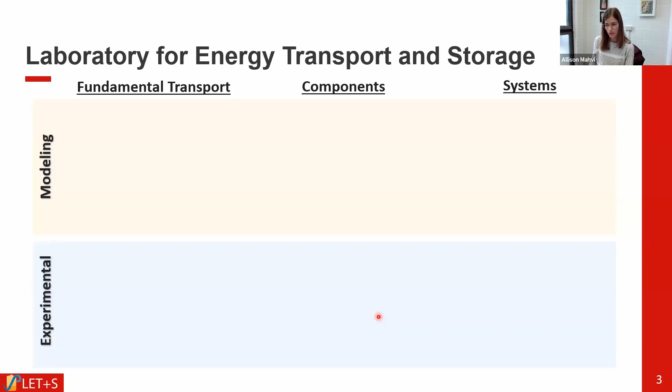In the fundamental transport space, we do a lot of coupling of modeling and experimental work, looking at things like annular two-phase flow, flow boiling, direct contact condensation, and other things like that.

This video on the bottom is an example of a direct contact condensation experiment we're looking at. We try to develop models that can predict things like acoustics, in this case of condensation, or dryout CHF, or heat transfer coefficients in the case of flow boiling, and use our experiments to validate models and try to understand the physics of the flow better.

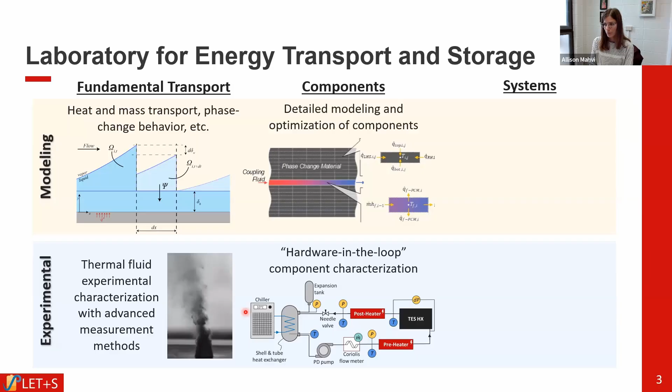We translate that work into developing components for different energy systems. This is an example of a thermal energy storage heat exchanger, a little different from the modeling and two-phase flow work shown on the left. Here, we're looking at how you design a thermal energy storage heat exchanger using different types of modeling approaches.

And then we test those components in a hardware-in-the-loop setup. We have a couple of these in our lab to make sure that the models we're generating predict the flow well.

And then we generally translate these components into systems. We've done some system demonstration type projects, some analysis around trying to understand if you optimize energy systems, you can quantify things like the operational costs, how do you optimize how you control the system, things like that. So generally, we try to get all of these different pieces to feed into each other and get a much better physical understanding of how two-phase flow and energy storage works inside of larger HVAC and power generation systems.

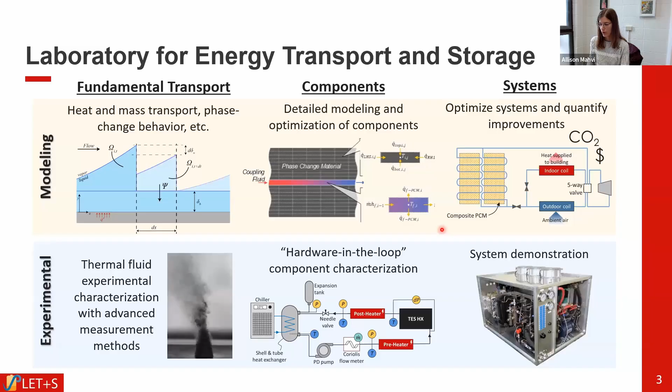So today I'm going to talk mostly about fundamental heat transfer, looking at flow boiling. Before I get started, I want to define critical heat flux. I think a lot of people work in this space, but just to get everybody on the same footing, critical heat flux, or CHF, is when a heated wall is exposed to a vapor.

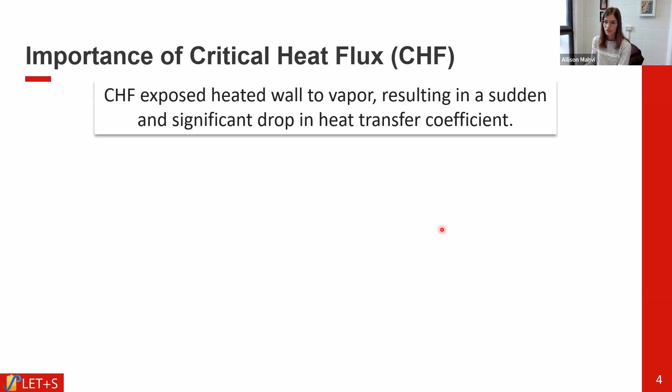Vapors are generally poor heat transfer fluids, and so you get a sudden and significant drop in the heat transfer coefficient. This can have different results depending on what type of system you have.

So if you have a heat flux boundary condition, that's something like a nuclear reactor, cooling of chips, where you just have a heat flux that is going to keep, or some object that's going to keep generating heat, if you drop the heat transfer coefficient, you need a larger driving temperature difference to dissipate that heat. And so the heated surface tends to become very hot.

In different scenarios, it can damage or destroy the equipment. Generally, boiling has a very high heat transfer coefficient, but it's usually used conservatively in cases with a constant heat flux boundary condition because you don't want to destroy your equipment.

You need a really strong understanding of when critical heat flux will occur so you can operate far away from that case. In temperature limited cases, this is an example of a vapor compression system.

The outdoor coil in this case is an evaporator, so it does have flow boiling inside of it. Industrial heat exchangers, and lots of other power generation systems, have heat exchangers with two-phase flow.

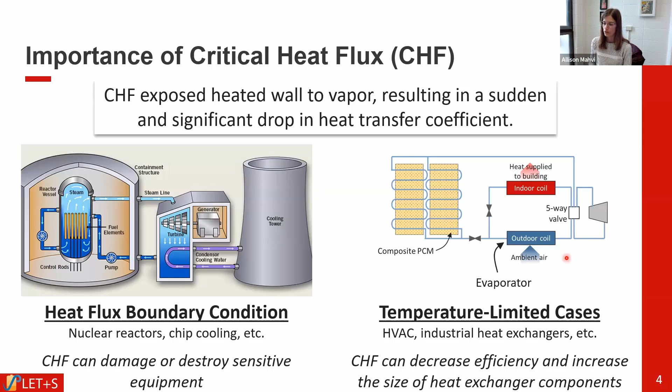If you have critical heat flux inside of these components, generally you're just decreasing efficiency. You have to increase the size of the heat exchanger components. There's a lot of disadvantages to going to critical heat flux, but you're generally not going to destroy the equipment. So it's just kind of different scenarios of what can happen when you reach a critical heat flux case.

There's two different types of critical heat flux that I'm going to talk about. We're going to focus on dryout critical heat flux, which is when you have an annular flow.

On the left, you have a boiling case where the fluid's coming in subcooled. It's boiling through this channel. You get a film that forms on the surface and eventually dries out. Generally, it starts by this thin liquid film breaking up because it becomes too thin. It's not stable anymore. You start getting this transient dryout where you get these little dry patches that form between disturbance waves, and then eventually the whole surface dries out. And you get this drop in heat transfer coefficient that's associated with that.

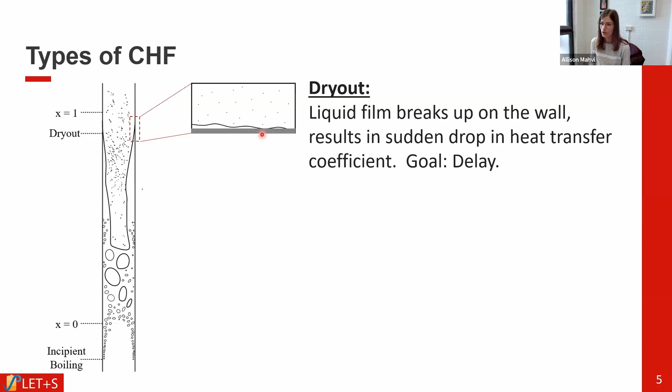Generally, the goal of dryout CHF is—in some cases, you don't need to fully evaporate the flow, so you just want to stay away from that. You want to stay at lower qualities and avoid it. But in a lot of cases, you want to delay CHF, so you want to delay it to as high a quality as possible so that you can shrink down the size of your heat exchanger. You don't have this region with a low heat transfer coefficient.

The other case of critical heat flux, where you get a vapor that's in contact with the wall, is called departure from nucleate boiling, or DNB. This is where you get lots of these vapor bubbles. They crowd the surface, they start conglomerating on the surface, and you get a vapor blanket that causes film boiling. So all of the heat then needs to transfer through the vapor before it can start evaporating the liquid.

You just generally want to avoid this at all costs. There's been a lot of research around departure from nucleate boiling, a lot of it focused on the nuclear industry, and there's been work trying to increase the heat flux that DNB occurs at. But generally we want to know it with very high certainty—where is this limit? When are we going to get to DNB?

I'm specifically going to talk about dryout CHF. There's been less work around that, and we have been doing some interesting modeling in that space to try to understand when it will occur, with the goal in the future of looking at how we can change the surface, or what we can add to the surface, that will impact dryout CHF.

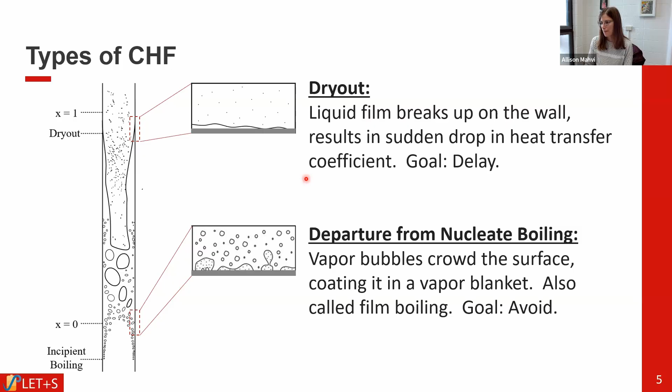So if you look at CHF modeling approaches, there's a range of complexity. On the simplest side, there are a lot of empirical curve fits or lookup tables that take a lot of experimental data—some database with many different boundary conditions, ideally lots of different types of fluids. Some are around a single fluid, some have lots of different fluids in them. And usually you try to non-dimensionalize different parameters that are important, then fit the data so that you can predict things like CHF or heat transfer coefficient.

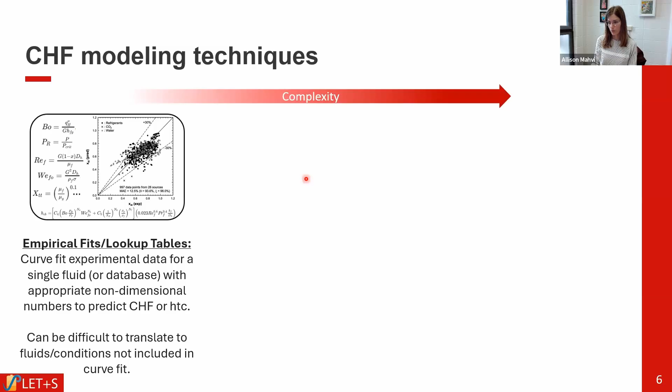There's a lot of advantages of these types of correlations or lookup tables, and they're commonly used, mainly because they're really easy to implement. You can write an equation—it's one line of code, something like that. The challenge is that it's not very easy to transfer. So if you want to translate to some other fluid or some other flow condition that's not in your database, you don't have very high confidence that you're going to get the right CHF or heat transfer coefficient value.

In a sort of intermediate complexity, there's mechanistic models. These usually try to discretize the flow in the flow direction and get an idea of how the different main properties of the flow interact with each other.

This is showing an annular flow case that's looking at the liquid film and a vapor core. There are other versions of this type of thing. The advantage is that it reduces computational time a lot from more complex models. You could theoretically translate to other fluids because you're doing a better job at trying to identify the physics that's happening. But the problem is they usually rely on closure relations, which we'll talk about, and you need pretty good closure relations in order to be able to translate between fluids.

And then on the most complex side is computational fluid dynamics models. These are where you discretize the conservation equations in 2 or 3D. They can be very computationally expensive, which is why they are not used generally for very large time-dependent data sets, but they can be very useful at translating to different fluids or different scenarios that are not a standard constant heat flux or something like that.

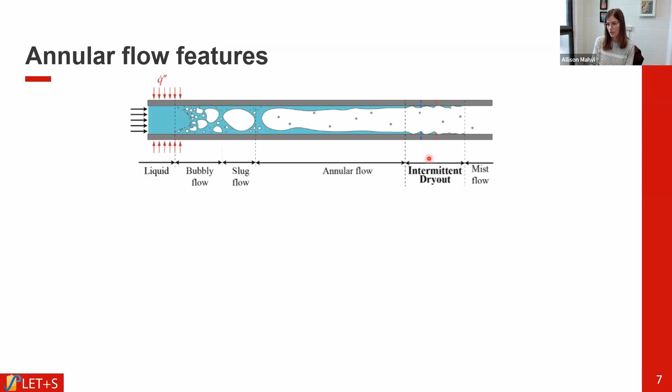So I'm going to show a video. There's fluid that's flowing from the bottom of the video to the top. There's this annular film on the surface of a glass channel, and then there's a vapor core going through the middle of it. So there's a couple main features that I want to point out.

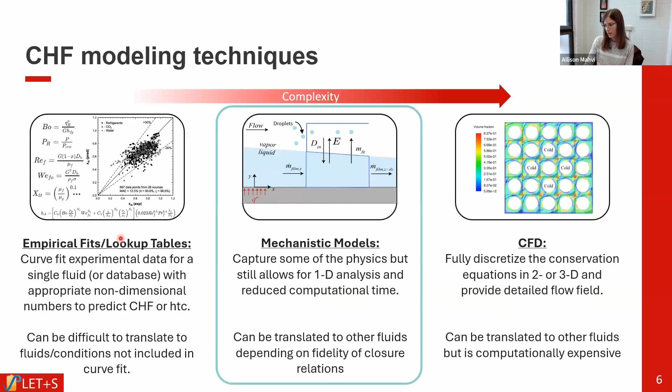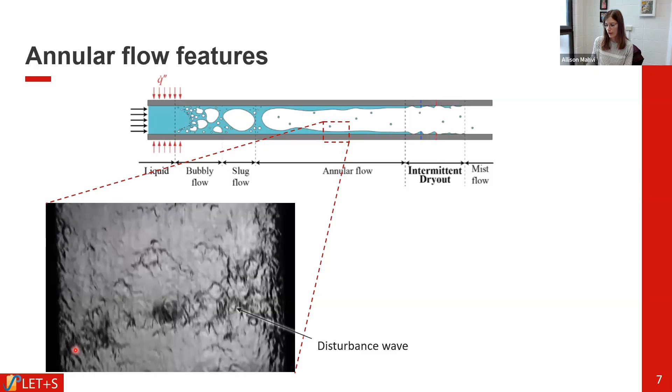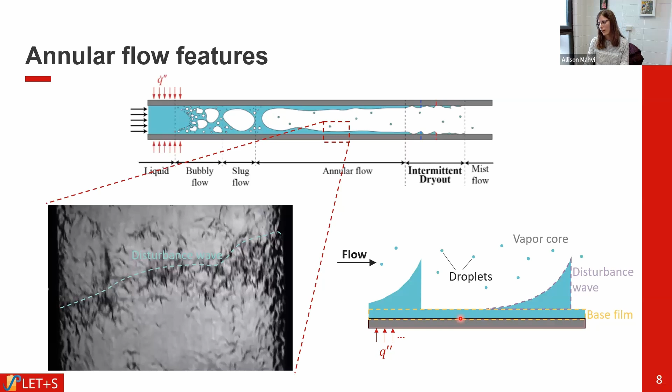So this is just a schematic of the same thing. Here's this disturbance wave. You have these disturbance waves on top of a base film. The base film tends to have these very small waves in it that don't have a huge impact on the total heat transfer coefficient or CHF. And then there's these droplets in the flow. They tend to be moving with the vapor core, moving pretty quickly, and they come from these disturbance waves. They get ripped off of these waves and stay in the vapor core. They tend to be hard to evaporate because they're not very close to the heated channel. So these are the main features: droplets, vapor core, a disturbance wave, and a base film.

The disturbance waves are pretty important. They carry a lot of the liquid mass. They're pretty thick, they're turbulent, carrying a lot of mass in the flow. When the flow is intermittently drying out, you get these dry patches that form, you can see it in this video, and then these thick waves come and re-wet that surface. Right as you're starting to dry out, the waves are what's keeping the surface cool. And then when they can no longer do that, maybe they're spaced too far apart, or they're not carrying quite enough mass to fully re-wet the flow, then you get to this more severe dry out case where the whole surface dries out.

Dry out has the disadvantage of dropping the heat transfer coefficient, but in some cases, if you have impurities in the flow, for example, they tend to deposit on the heated surface in this region that's drying out. And so that can be another issue in your flow. You need to deal with corrosion and deposition of different impurities in this region.

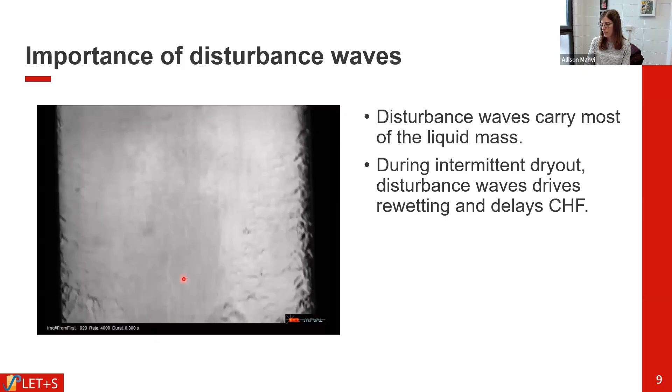People use mixture models a lot to understand what's happening with liquid films. In the 70s, a couple different research groups looked at adding more features of annular flow to it, so instead of just a liquid film and vapor core, it also measured droplets, looking at entrainment of droplets and deposition of droplets onto the liquid film, trying to get closer to reality and get a better prediction of heat transfer coefficient and CHF.

Then in 2022, one of our collaborators, Jean-Marie Le Corre, developed a 4-field modeling framework that looks at the base film and the waves separately to try to get more at intermittent dry out and predict dry out a bit better.

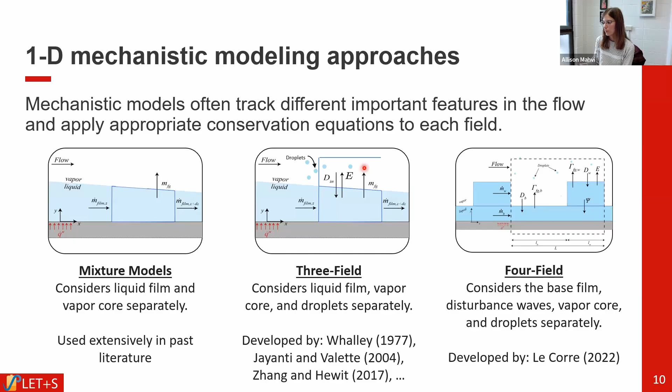Some of the motivation for this was also looking at impurity deposition, when that might occur when you get really thin base films. So we've been developing that code with him, trying to come up with a model and supplying experimental data to improve the fidelity of it.

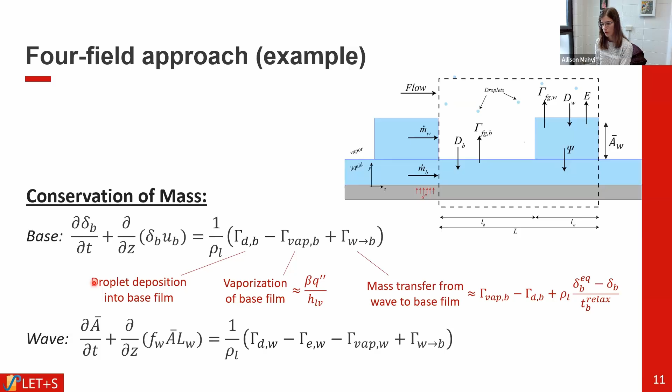To get at some of these properties, we need to know things like the wave shape and surface area, the equilibrium base film thickness, the time scale to return to equilibrium state inside annular flow, and wave frequency and wave dynamics. There's a lot of this information that we need, and it's generally hard to measure, so we wanted to get a better idea of how those pieces worked.

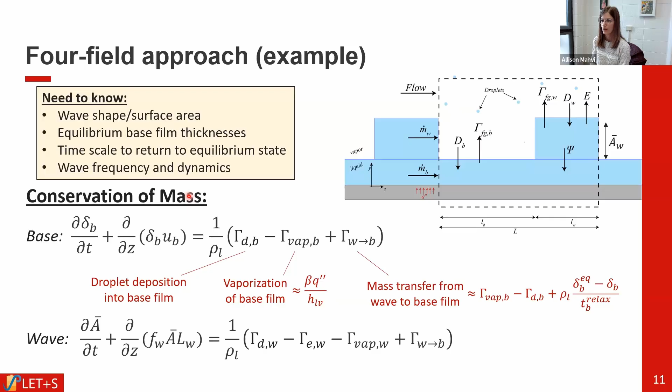Jean-Marie Le Corre, who originally developed this model, did a validation study this year at NURETH looking at prior work, first from Würtz, who studied adiabatic annular flow of water at 7 megapascals. Jean-Marie compared his experimental data to the 4-field model he developed, and found it compared well for things like base film thickness, wave velocities, and wave number density—good agreement between the adiabatic data and this modeling approach.

He also looked at the non-equilibrium, how it returns to equilibrium. This is a data set where the left side of the x-axis is a heated section, and the positive side to the right of the dashed line is adiabatic. We're trying to come up with how the film reacts to this change in boundary conditions.

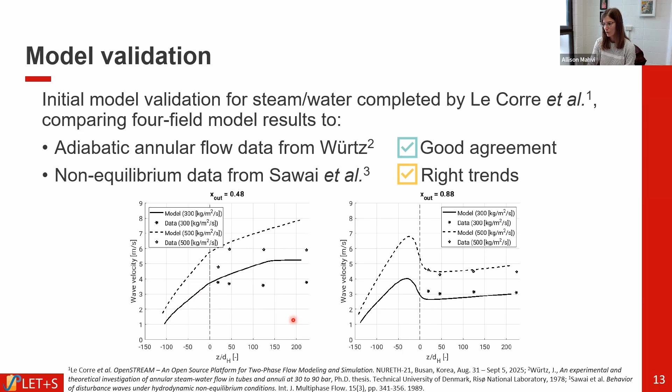The model is shown as lines and the experiments as points. We found generally the right trend in the data, although this needs more work in understanding how this non-equilibrium transition happens, getting more data for more cases, and diving into it in a bit more detail. But we did generally have the right trends.

With one of my collaborators, Juliana Duarte at University of Wisconsin in the nuclear engineering space, and her student Cole Dunbar, we're trying to take this model we developed and move it into a more complex system. The experimental data from the last slide was a single channel flow with a relatively simple boundary condition.

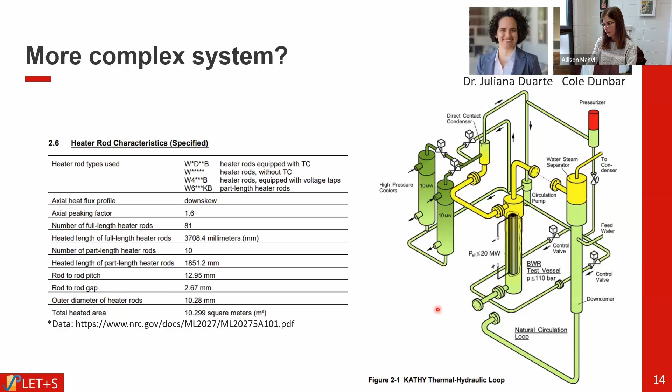We took the same modeling approach and tried to apply it to a boiling water reactor, specifically looking at the KATHY thermal hydraulic experiments, where they tested a fuel or rod bundle of a boiling water reactor at prototypical conditions.

So we're working on the second portion of this, but the first portion was looking at a 3-field model. We want to understand when we'll get to the critical bundle power for this rod bundle. We used the code we developed and looked at steady state data with an axial power profile, like some cosine profile for heat flux along the length of the channel. On the y-axis is the model predictions, and the x-axis is the experimental critical bundle power. We generally found great agreement at steady state. The model did really well. This is encouraging. It did a little better than we were expecting, actually.

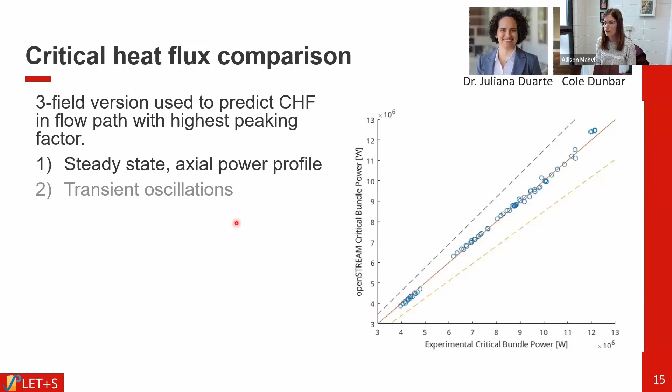And then we're still looking at this transient data. One of the things that makes some of these mechanistic models shine more is when you have really complex boundary conditions. Maybe you have something causing oscillations in your flow, some instability, and you want to understand how the surface temperature is going to oscillate. It's hard to find something like that in a lookup table. So you can use these mechanistic models to get there.

Just a note, this is a very different case. It's not a single channel, so we did have to change our code slightly to deal with all of these spacer grids. Boiling water reactors tend to have spacer grids as you move up the channel, and those distribute the droplets. The droplets in the vapor core get redirected at the surface and can re-wet it. We made some assumptions about how that happens inside the model, which helped with the fit here.

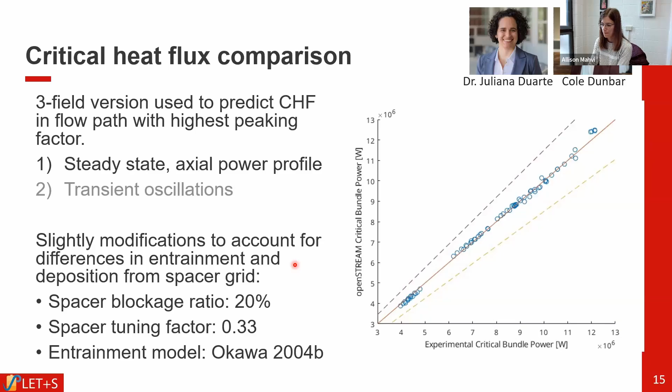Okay, so what I've talked about so far has only been water. The vast majority of past work in critical heat flux has been for high pressure water systems, a lot of it motivated by the nuclear industry. But it's not clear how we take models developed for water and translate them. Specifically for this 3- and 4-field approach, there's a bunch of closure relations, like droplet entrainment, baked into the model. We wanted to understand how important those models are, how well they capture other fluids, and whether it's transferable. If we look at a totally different situation with a different fluid, a different system, will we be able to do that?

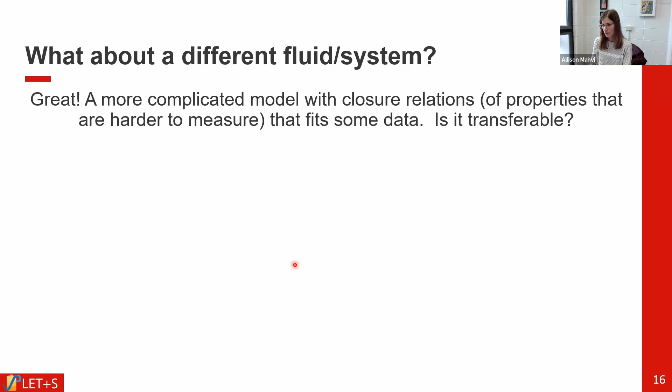So typically what you do is run a new set of experiments, make sure your existing models work, or try to tweak your existing models for this new refrigerant. We're trying to skip over that step and just use some sort of mechanistic model, hopefully one that captures the physics well, to get to the critical heat flux.

If you look at our current model, we've been looking at boiling water reactors, and the properties are just very different than a refrigerant. The enthalpy of vaporization is much, much higher. Density ratios tend to be a little bit lower. And the Weber number is much different than a refrigerant. So it's not clear that it's transferable.

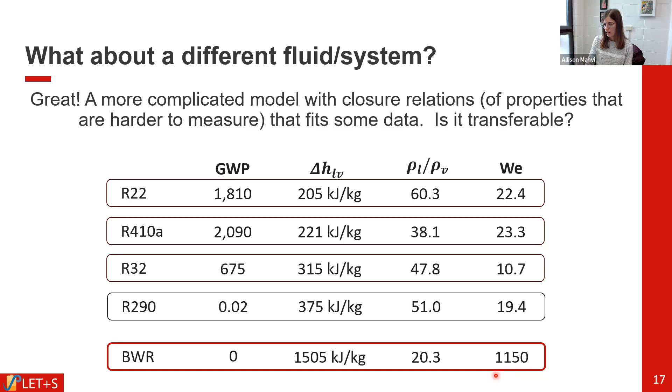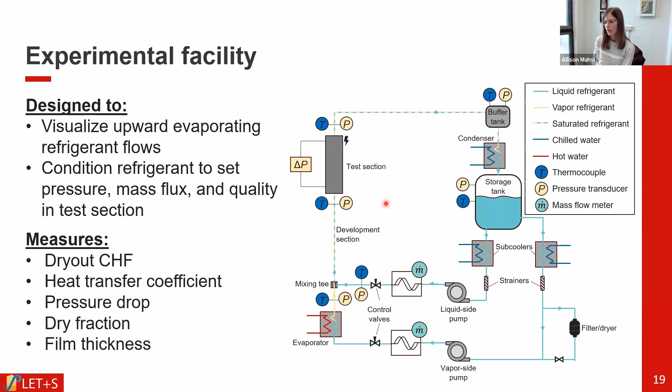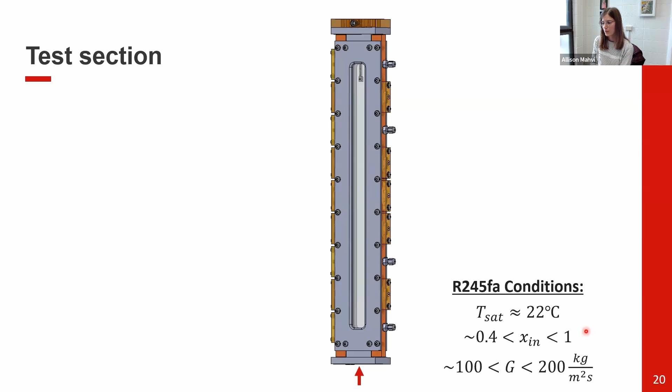So this is a picture of our test section. We send refrigerant in through the bottom at some pressure. Most of our experiments are run right around ambient temperature, which makes it really easy to change the conditions and pretty fast to get up and running. Quality is between about 0.4 and 1, and mass flux is between about 100 and 200.

If you look at a cross-section of the channel looking up, you can see that our channel is rectangular, 36 millimeters by 12 millimeters. This is all annular flow experiments, so there's a liquid film along the surface of the channel, and then a vapor core through the middle.

There's a glass pane on 2 of the sides, along the 2 long sides of this rectangular channel. It's coated in an FTO coating, and we pass a current through it and Joule heat it. In some cases we have a little obstruction on the surface, and in some cases we don't. The point of the obstruction is just to understand how liquid films respond around solid surfaces.

The optical window is really nice, having this transparent window that we can heat but still see through. So we can do flow visualization using a high-speed camera, and we can do a lot of optical measurements.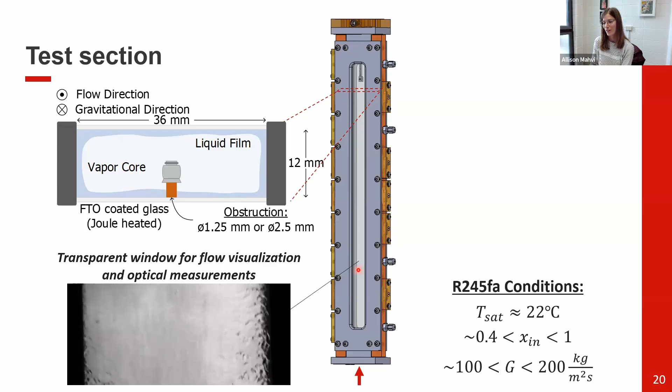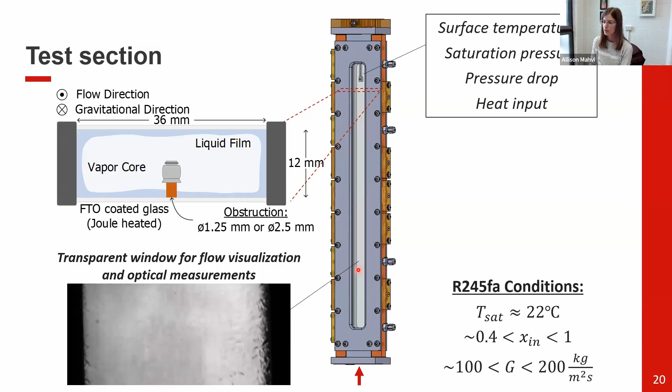These liquid films tend to be very thin. If you start putting sensors inside of the liquid film, it can be a problem for measuring what you want to measure. So we really try to use optical techniques and try not to put anything inside of the flow channel. Beyond these optical measurements, we also measure things like surface temperature, saturation pressure, pressure drop, and heat input, which gives us things like the heat transfer coefficient, a helpful property for us.

I want to talk through some of these optical measurements. We specifically try to use optical measurements that aren't super complicated and are pretty easy to implement on the side of our test section, so that we can get a lot of data from these pretty quickly. We can change things very fast, and it's not very sensitive.

The first thing that we measure is dry fraction, the amount of time the surface is vapor versus the amount of time the surface is liquid. We do that by using a laser directed at the test section at a specified angle, and we measure the amount of light that gets reflected into a photodiode.

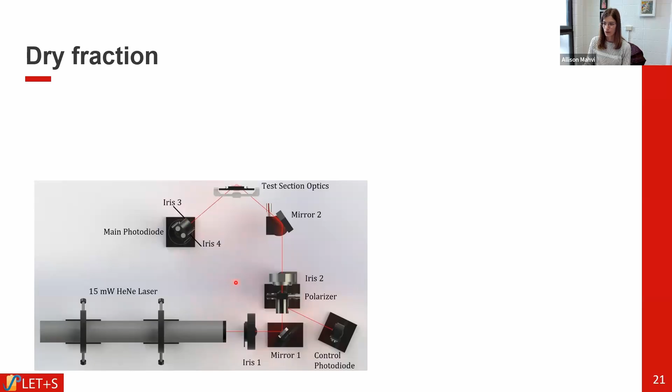This light passes through the glass of our test section, this heated glass. If there's gas on one side, there's a big index of refraction change between the glass and the refrigerant vapor, so more light gets reflected back at the photodiode. Whereas if it's liquid, there's a smaller difference in index of refraction, so you get less light reflected back.

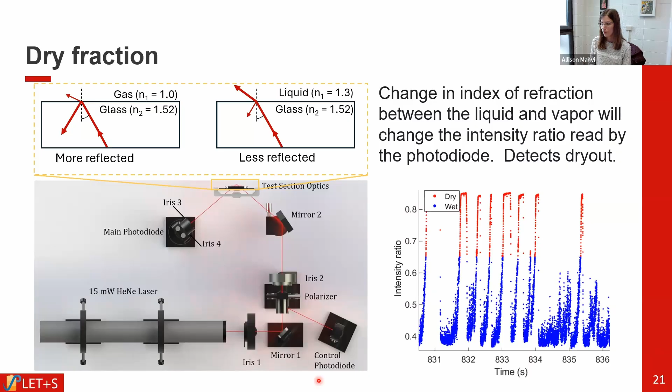So we really look at the intensity ratio of the light incident on the test section versus the amount coming back. This is an example of the data we get: intensity ratio on the y-axis and time on the x-axis. When the intensity ratio is small, the surface is coated with liquid, and when you get a spike in intensity ratio, you have vapor on the surface. We're really looking at the time comparison between these two things. It can tell us the frequency of waves, and other things, and can help us predict heat transfer coefficient. You can collect a lot of data because you're just measuring a single point with a photodiode, at a really high frequency, which is helpful.

This is an example of what we use that data for.

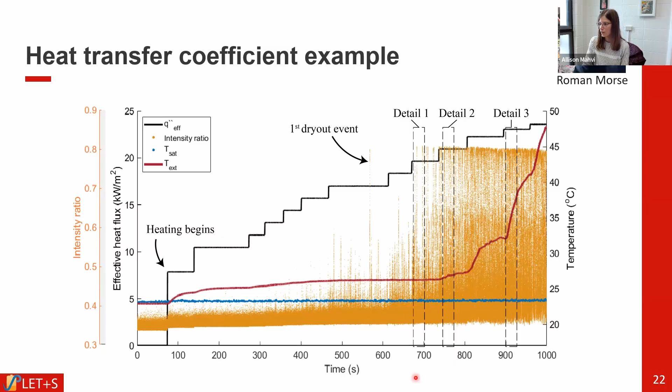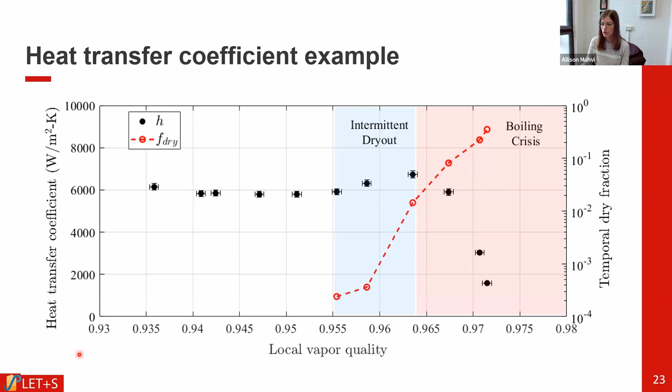This dashed line is the temporal dry fraction, how much of the time the channel is dry versus wet. You need to get past a certain threshold - if the channel just has a little blip every once in a while becoming dry, it doesn't really impact your heat transfer coefficient much. Whereas if the channel is dry for a large period of time throughout the test, you get this really sudden drop in the heat transfer coefficient at some quality.

So that's dry fraction, one thing that we're measuring. The other thing that we're measuring is trying to understand the disturbance waves. We really want to get at how the disturbance waves are dynamically changing, how they are impacted by boundary condition and operating condition. The way we do that is by measuring the liquid film thickness.

Again, there's lots of different ways to measure the liquid film thickness. We wanted something optical and something that was pretty easy to implement. So this setup uses a laser. You direct the laser at the glass channel, and we have a little thin piece of tape on the surface of the channel that diffuses the light.

When the light diffuses, if it hits this liquid vapor interface where there's a large change in index of refraction at a relatively shallow angle, it'll just continue going through the test section, keep going to the other side. But for some of this diffuse light, if it hits this liquid vapor interface at a large enough angle, something beyond the critical angle, it will totally internally reflect and get reflected back towards the laser.

We then have a high-speed camera to pick it up that can operate at pretty high frame rates, and we can get an understanding of how the liquid film is changing inside of the flow.

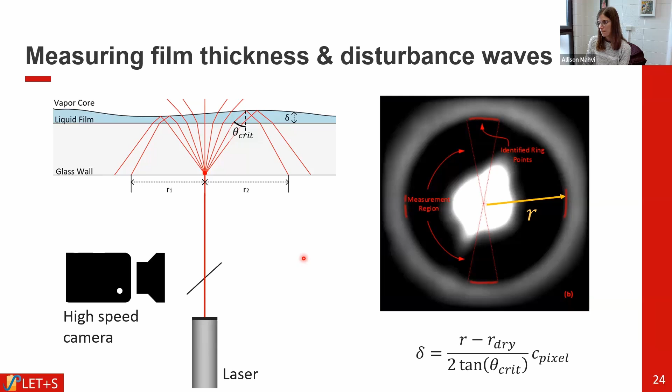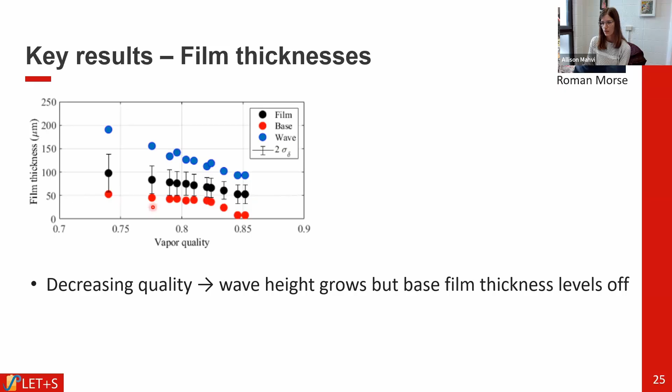As you decrease the quality, we found that the wave height grows, which makes sense, but the base film thickness levels off. We found that generally it levels off around the thickness of the viscous sublayer if you put it in wall units, which is an interesting finding in this particular experiment. We're currently evaluating different closure relations to try to understand how the base film thickness changes with fluid properties, looking at some of this water data as well as our refrigerant data.

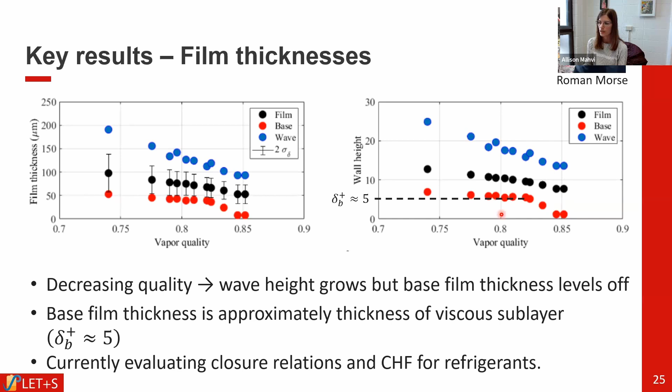All right, so that gets a little bit at the refrigerant case. It's still a work in progress. We're trying to understand how four-field models can predict refrigerant CHF. We're also extending this in a couple different ways. I'll talk about one of them today.

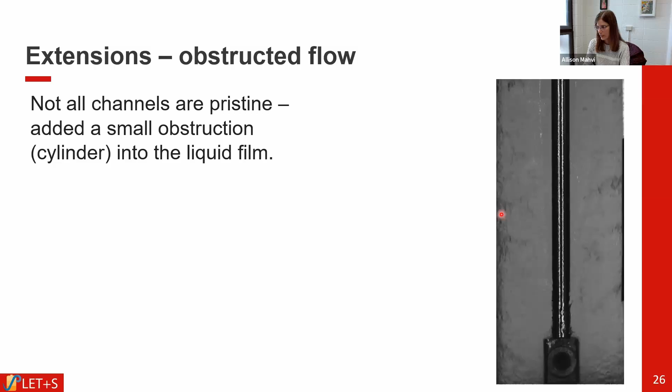We are looking at flow around an obstruction. This is just a small cylinder in the flow, some imperfection, maybe a fuel pin or something else, or something purposely put in the flow, and trying to understand how the liquid film goes around it.

So there's a couple different regions that you can see. We have this obstruction at the bottom. Before the obstruction, the flow is undisturbed, so it looks exactly like it would if there was no obstruction. This is the upstream region.

Once it hits the obstruction itself, it forms a wake. And in that wake region, immediately after the obstruction, you get a recirculation zone. You can see these vortexes forming inside of this zone. It's pretty chaotic.

And once you get past that general region, you get a very thin liquid film. It's very calm. Generally, as the liquid film gets thinner, the disturbance waves go away. So you get this calm, slow-moving liquid film that eventually dries out inside of this wake region. So you get this small region of dry out downstream of the obstruction.

And then on the periphery of the channel, you get this exterior free stream flow that has a lot of these disturbance waves still in it. The film is pretty thick out there. And so when you do have obstructed flow, you tend to get premature dry out, but only in a small region. It's only in this wake region. And so it doesn't necessarily have a huge impact on what's happening at the periphery.

In addition to some of these kind of videos, we put in a bunch of thermocouples downstream to try to get an idea of how the heat transfer coefficient varies as you move downstream of the obstruction and what's happening with the fluid itself.

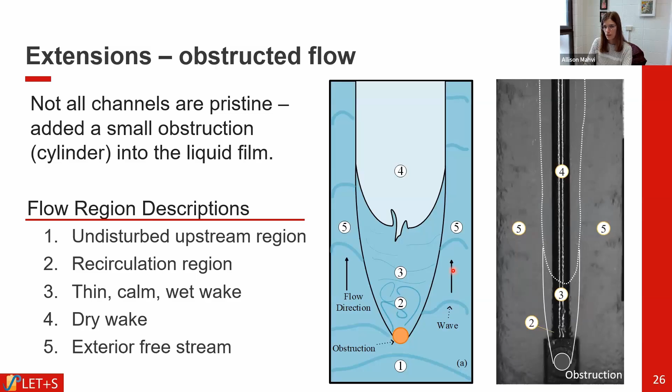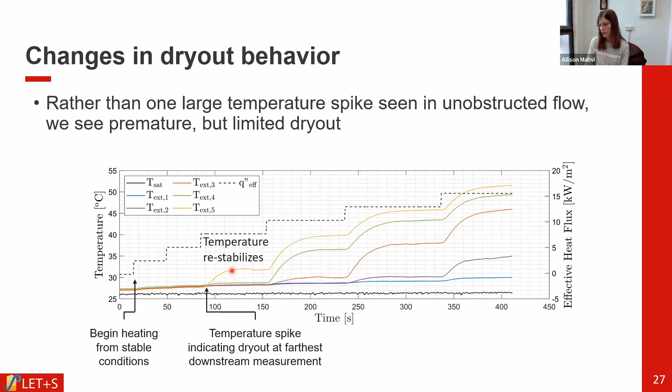So eventually, at certain locations, you get the flow drying out in this wake region. It starts pretty far downstream from the obstruction. And then as you increase the heat flux, you get this dry region extending farther and farther upstream to these closer thermocouples. And every time you do that, you get this increase in the temperature and usually it restabilizes.

It starts getting pretty hot, but it's not running away in the same way that it ran away in the cases without an obstruction. And just to note, the heat fluxes are lower here, so it tends to dry out sooner. Maybe this has problems around like corrosion and deposition, but you don't get this really dramatic runaway effect. You get kind of a steady increase or a steady decrease in the effective heat transfer coefficient, and it's proportional to the wake size.

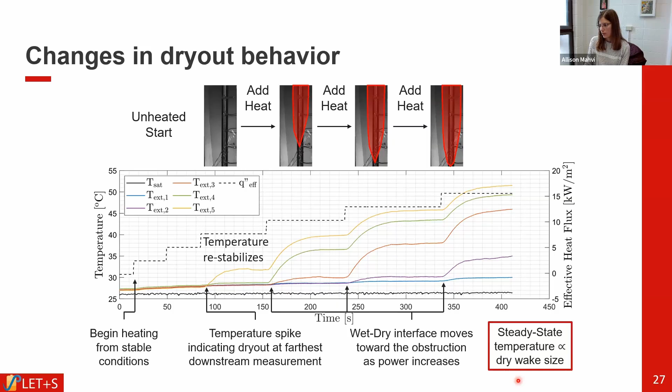So generally, we found that the film thickness ratio between this wake region and upstream is not very impacted by the inlet quality. It's not impacted very much by the heat flux. There is an impact on the mass flux coming into this obstruction and the size of the obstruction itself.

So if you have a large obstruction and relatively slow moving fluid, the wake region can have 20% or so of the film thickness of upstream. So there's a really dramatic change in the amount of mass going in the wake region versus the periphery. Whereas the smaller the obstruction, the higher the mass flux, that wake region becomes less important and you don't see dry out as much.

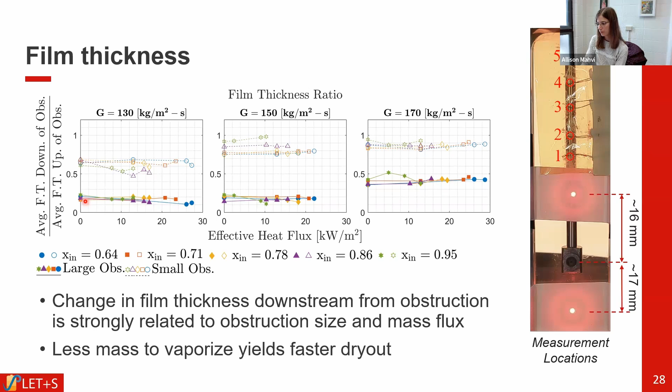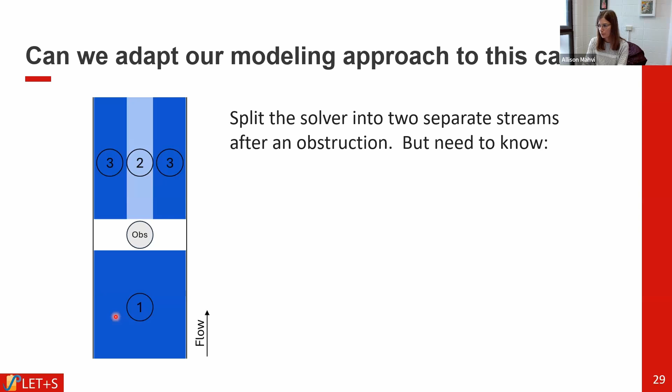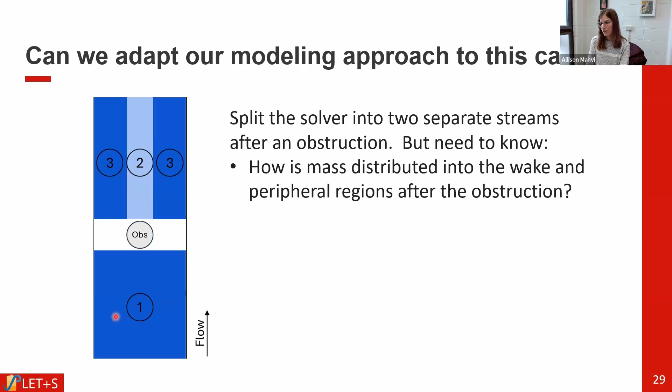But to be able to do this sort of thing, we need to answer some questions. We need to know how the mass is going to distribute around an obstruction. We need to know how the waves are impacted by it. We see generally that the waves split around an obstruction and don't reform in the wake region. They mainly stay out in region 3.

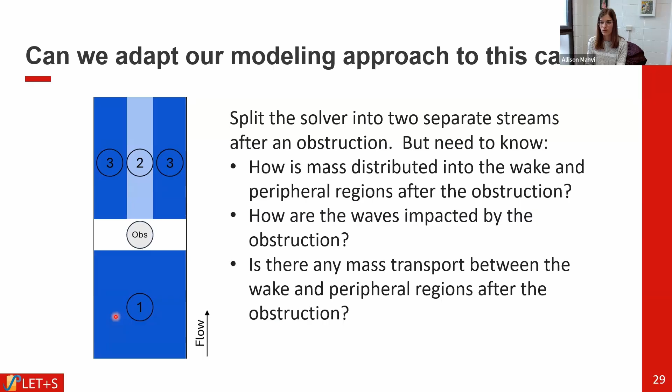We also need to understand mass and momentum transport between region 2 and region 3. Do you get this wake region where they don't interact with each other too much, or do they continue to interact as they move downstream? So those are some questions we're trying to answer now with these obstructions.

This is actually a falling film setup, but we took a long exposure video to try to understand how the film is going around some obstruction in a thin liquid film. So what we did is we seeded the fluid with a bunch of particles, and then used particle tracking velocimetry to get a velocity profile around it.

Here, we didn't use this particular image for it. We tried to track particles, but this shows you these streaks in the flow. You can see the fluid going towards the center, a very slow moving fluid in the immediate wake. This case is not very typical, but shows you a more dramatic velocity gradient around an obstruction.

And then we looked at film thickness mapping. We wanted to understand, if you take a slice of this thing, what is the film thickness across it, so that we can get a better idea of mass flow. Right now, we just had the film thickness - we don't actually know what the mass flow rate is through these different tracks, and so it's hard to actually model it in our four-field approach.

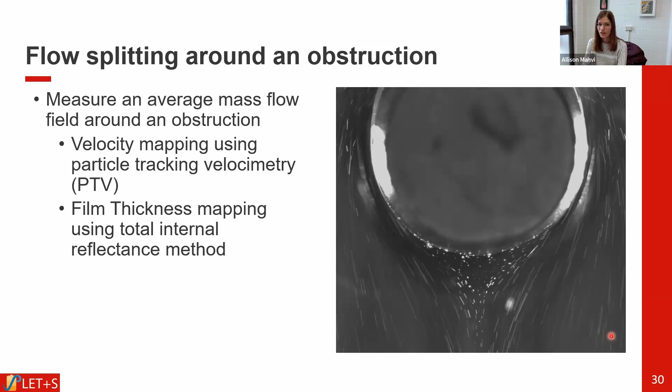So this is the type of data that we're getting out of these experiments. There's a lot of information here. On the top, you have some obstruction. We're imaging the flow downstream from it. Again, this is a little bit of a weird case - if anybody wants to talk about it, we can. But if you look at different distances downstream from the obstruction and different X positions, we measure the film thickness.

So this is this red dashed line in kind of a slice across the flow. And then we also measure the mean velocity gradients across this window to try to get an idea of where is most of the mass. Is it - there's these regions that are both relatively thin. This red line is thin, and the velocity is slow, which makes sense together. And we can get an idea of what is the mass flow distribution downstream from the obstruction.

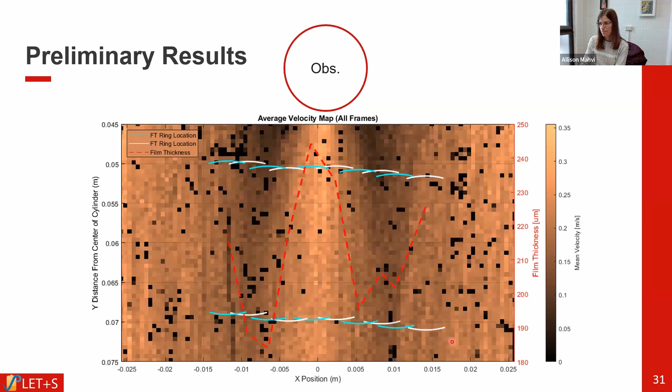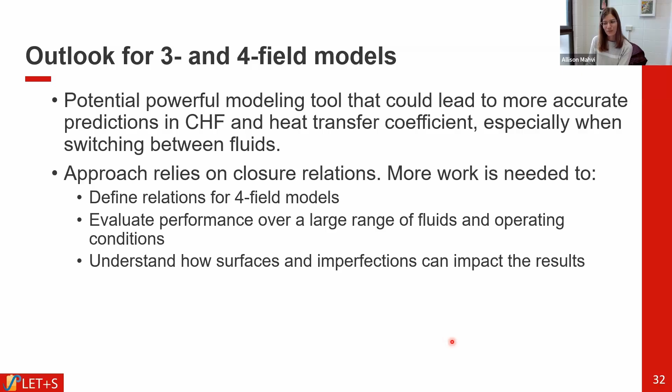All right, so just a little bit of an outlook for what to do with these types of models. They're potentially powerful - they can help predict CHF, heat transfer coefficients. You can switch between fluids, potentially, if you have good closure relations. But we really need more work on the closure relations portion of it.

So for the four-field models, there's not a lot of work around how the disturbance waves interact with different fields of an annular flow. And we need to evaluate performance over a much larger range of fluids and operating conditions to get a really good idea of when the four-field model is useful, and what's its purpose in this larger computational space. Specifically, one thing our lab is interested in looking at is how do we take these four-field models and look at other types of questions, either weird boundary conditions?

How do you maybe optimize the surface to delay dry out, for example, or what can you do with the surface to change how liquid is distributed between droplets and waves in the base film to try to keep the liquid close to the wall? And then also looking at imperfections, fuel pins, something that's purposely put there perhaps, and trying to understand how fluid goes around some of those things or obstructions without going to very complicated models. So you can still put it in something with interesting boundary conditions, something with a large time trace. They're very fast models, but

Some of the physics still needs to be resolved. One disadvantage of this approach is correlations are very easy to use. It's like a single line of code, maybe a couple lines of code, but it's not very difficult to use. This is more difficult, not as difficult as CFD, but not simple.

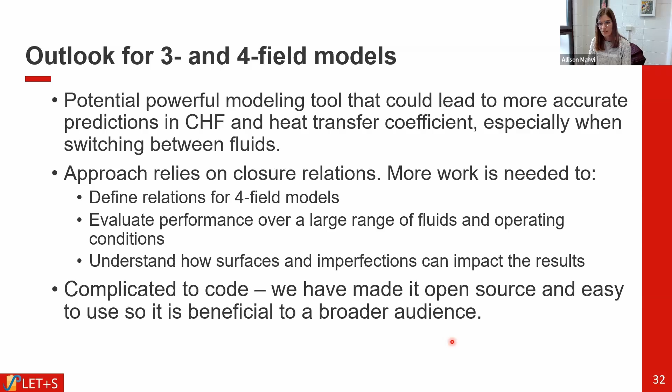One thing we've done recently is try to make this modeling framework open source so anybody can use it if they want, make their own closure relations, try to look at how surfaces impact things like that. So this is just a screenshot. You can find this open source solver on GitHub. This was developed by some of the students in our lab. Jason Chan was one of the big developers of this open source model, along with Jean-Marie, who came up with the four-field approach in the first place, Cole Dunbar, and Tyler Lee. There's a couple of people working on this, trying to make it easier to use, putting in more closure relations, doing more validation, and that type of stuff.

So that's all I have. I'm happy to answer any questions in the last 10 minutes or so. Thank you very much.